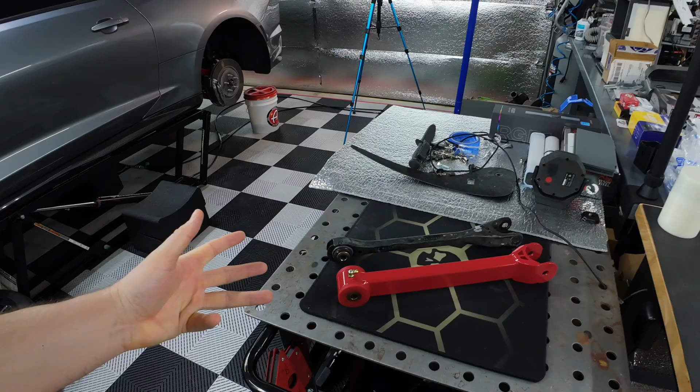Improving the performance of the 6th Gen Camaro by upgrading to the BMR Upper Control Arms. Let's get this thing installed.

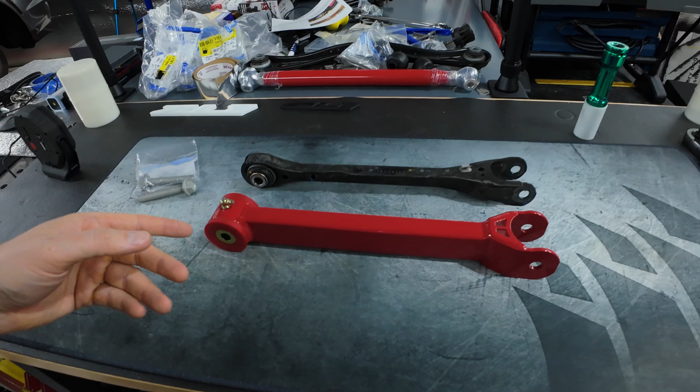Welcome everyone to the Derpzilla channel. Today I'll be upgrading to the BMR Upper Control Arms right here on my workbench. We're going from the relatively good OEM Alpha chassis Camaro upper control arm, with this kind of doughy rubber bushing. This piece isn't horrible, I've seen much worse on an OEM car. The Camaro is known for having quite good handling, but like anything, you can upgrade it with an aftermarket option.

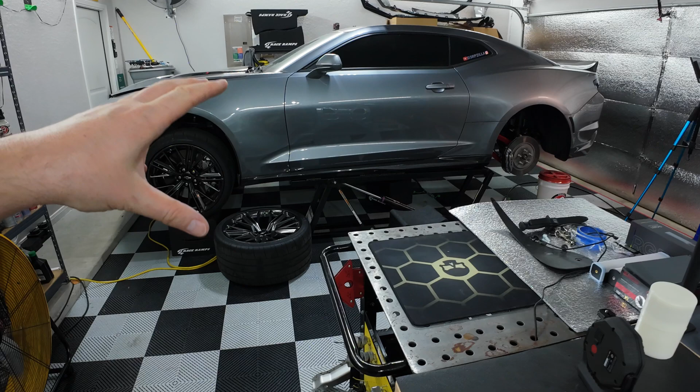I went with the BMR. This is part 5 of my BMR suspension upgrade video series. It's been about a month since my last one—I've been doing about 1,000 different projects. I wanted to jump back and hopefully get this car back on the road. It's been way too long sitting here on my quick jack in the garage.

So we're going to jump back into these. Hopefully I can get this whole process done soon. As you can see here, I have one of the BMR upper control arms. They actually have 3 variations. This is the fixed non-adjustable one, goes for about $130 from BMR. You can probably get it cheaper from other suppliers. And pretty much, this is it.

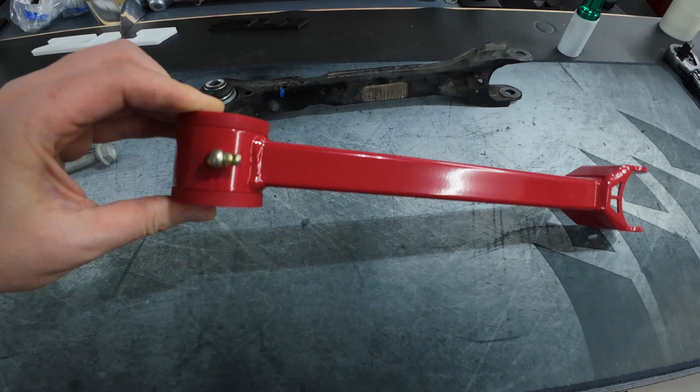You get this solid, I think 1.5 inches of box steel, CNC machined. You've got the polyurethane bushing with a super cool grease fitting, so you'll have to make sure you grease this bad boy once it's installed. Pretty solid, pretty stout—pretty much set it and forget it. You install it, and other than greasing the fittings on occasion, you're pretty much good to go. You don't have to really worry about it.

Usually not as noisy as the multiple adjustable options, but for people tracking the car relatively frequently who need rapid alignment changes, they offer 2 more options. There's the off-car adjustable, which is pretty much just another piece—I think it's on this side, I can't remember, I don't have a photo of it. What you do is actually adjust right here and lengthen your control arm based on whatever suspension alignment you're trying to dial in. Then there's the on-car adjustable, which I believe has adjustable pieces maybe on both ends, I can't remember, but the cost is about $100 more than the non-adjustable.

The cool thing about that is you can have it on the car, fully adjustable, and really dial in that alignment exactly how you want it. For me, I had a fully adjustable suspension on my previous car, a Subaru WRX, and I adjusted it once when I installed it, never did it again. It's a little noisier. I wanted to go with something a little more solid, more durable, and just get this thing installed and not have to worry about it.

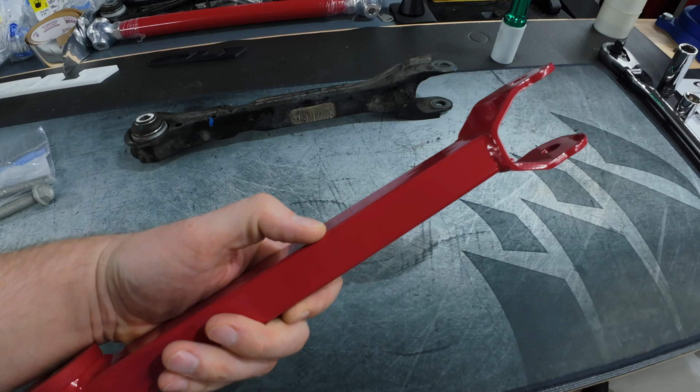As you noticed, it took me about a month to get this video out from my last one. I've got a lot of things going on, and worrying about having to get this thing adjusted all the time is just something I didn't want to do.

Anyways, we've got the car over here. We're going to take a look at what it looks like already installed in the car, and what it looks like before you install it—I actually have it installed on the other side already. Then we're going to go over what we need for the installation. Super easy, 2 bolts, 18 millimeter. Not bad. So let's go ahead and get over to the car.

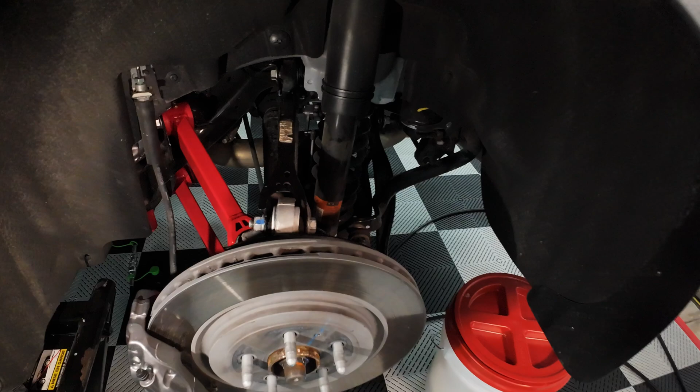I'll show you what we're looking at, and let's get this thing installed. Here we are—this is my driver's side, and the one remaining OEM part, right here, is the factory upper control arm. If you can see here, there's a brake line that attaches to the side of your upper control arm, so make sure you remove that during the installation process. You don't want to rip your brake line off while working on your car.

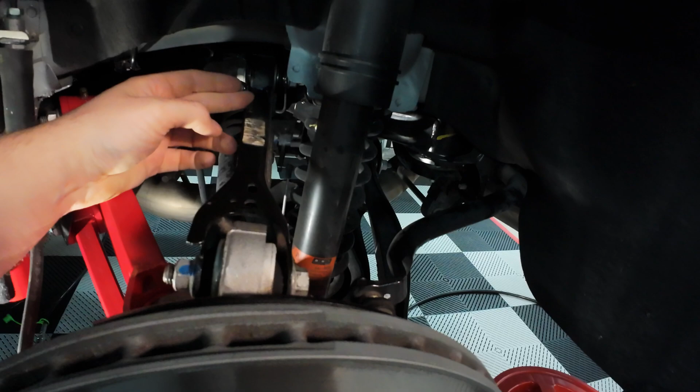The thing about the BMR piece is it does not have a fitting for an upper control arm brake line. So I'll show you what we need to do. Pretty much just zip tie, zip tie fixes everything.

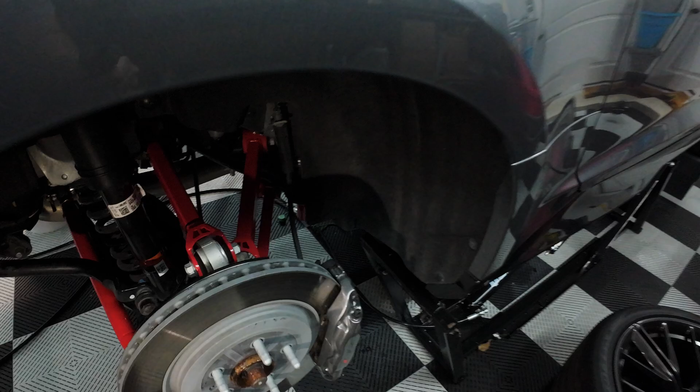So let's look at what it looks like once it's installed, which I have over here on the passenger side. And there you go. Hopefully I get some good lighting in here. Yeah, kind of hard to see.

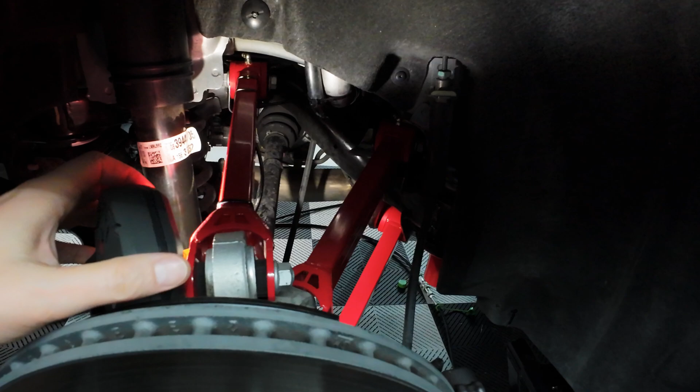Sorry about that. But anyways, we have the BMR upper control arm here. I got a zip tie, actually another zip tie. So 3 zip ties holding my brake line in a relatively pretty good position out of the way. You don't want to rip that brake line.

Notice the angle or position of your grease fittings will be on the top. Make sure you do not install this upside down. That would not be good.

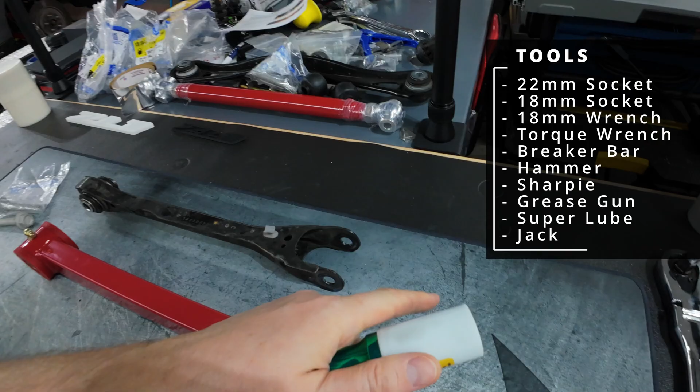For this install, very few tools are actually needed. You're going to need a 22 millimeter socket, preferably the soft touch ones that have this little plastic sleeve, and that's to actually remove the wheel off your car. Now, of course, if you're following through the whole series and you already have the wheel off, you don't need this for this one, but you'll need it to put the wheel back on once you're done with all of your suspension upgrades. You're gonna need an 18mm socket.

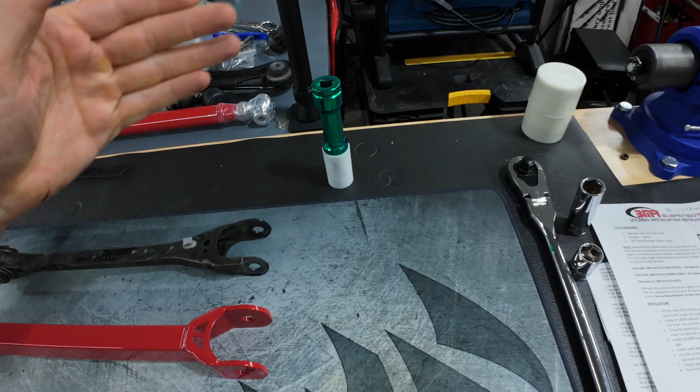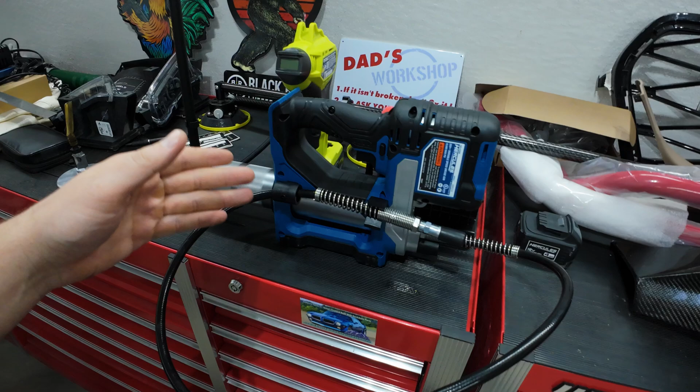You'll probably want an assortment of different sizes, a couple different ratchets. You're gonna want a grease gun of some sort. I have this fancy Hercules one from Harbor Freight, but of course a hand pump one works fine. This has the Super Lube grease that I'm gonna be using to grease the grease fitting on the upper control arm. And of course, you're gonna want a torque wrench so you can dial in your torque settings for your installation.

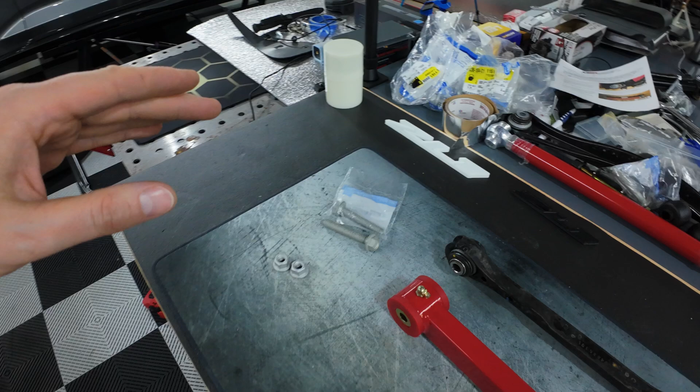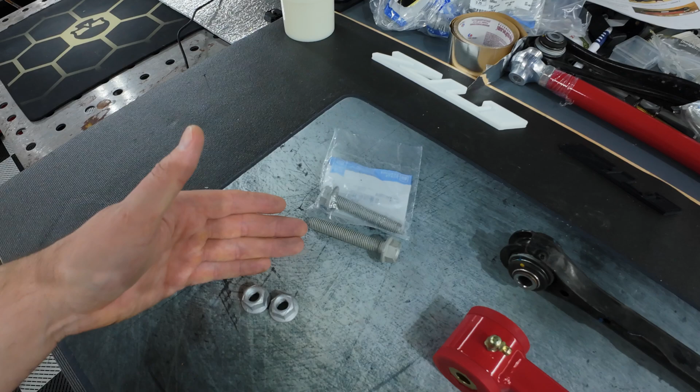And if you are hardcore like myself, new bolts and nuts - they are torque to yield. Technically, you're not supposed to be reusing these. Many people do. The torque values are gonna be slightly different if you're reusing them, but they do stretch every time you torque these, and potentially could be a point of failure.

BMR says they've done numerous testing, haven't had any fail on them, but I went with this whole suspension series. I'm replacing every bolt that's torque to yield. I figure for a few dollars, why not?

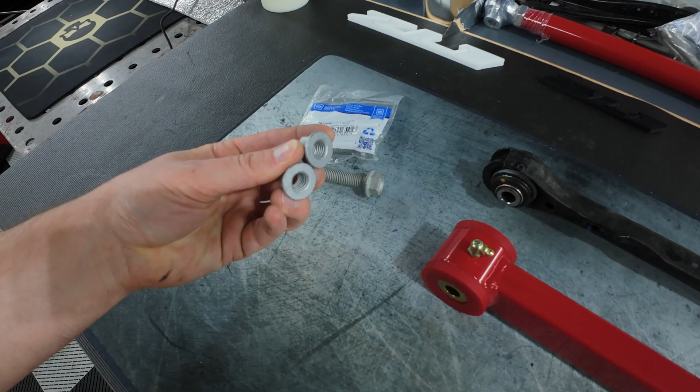But for the bolts, you're gonna need 11610908, and you're gonna need 11610909, and then the nuts, which is 11516078. I'll have, of course, links in the description for all of these and everything that you need, and a link to the BMR upper control arm and all that fun stuff.

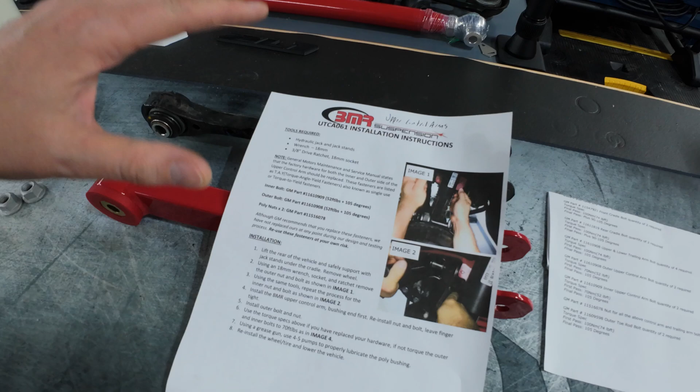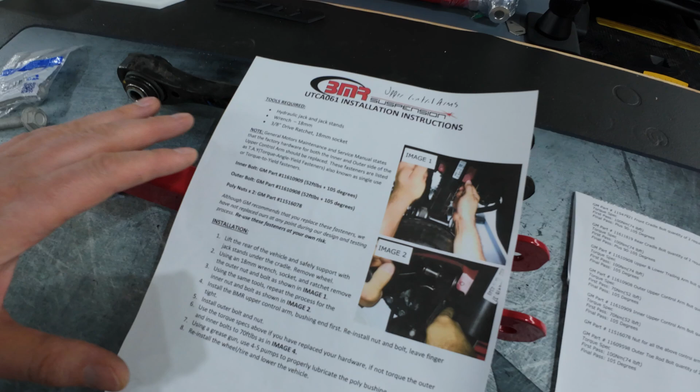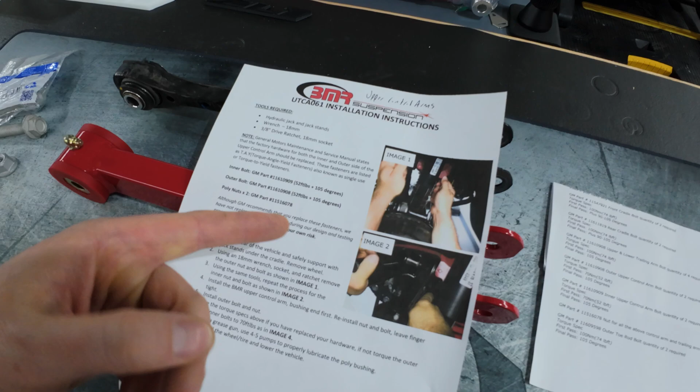BMR does offer a very handy PDF install instructions that you can download and print if you so choose. Now, they've had some questionable data on their torque values that they've changed a few times depending on when you downloaded this. I actually did get an email from them a while back with all the actual torque values. These should be the most up-to-date ones, so I'll be going off of this. For this actual install, it looks like they do match, which is good, but I've had previous ones where these wasn't matching this, so it got a little confusing.

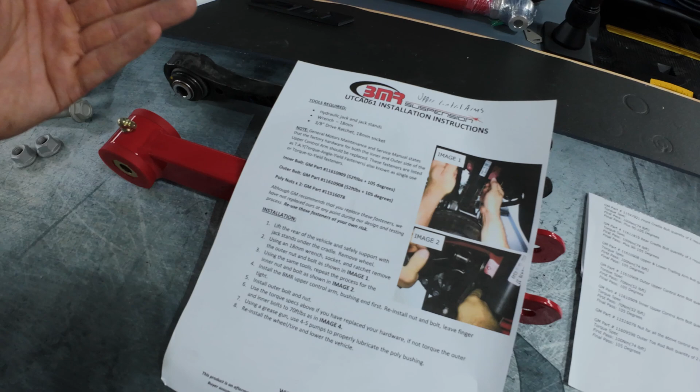But as mentioned, you're gonna, of course, need a jack. You need your 18mm socket, drive ratchet 3/8 or 1/2 inch, whatever you can fit in there. There's pretty decent room, so we shouldn't have too much clearance issues. Maybe the inner is a little bit less clearance.

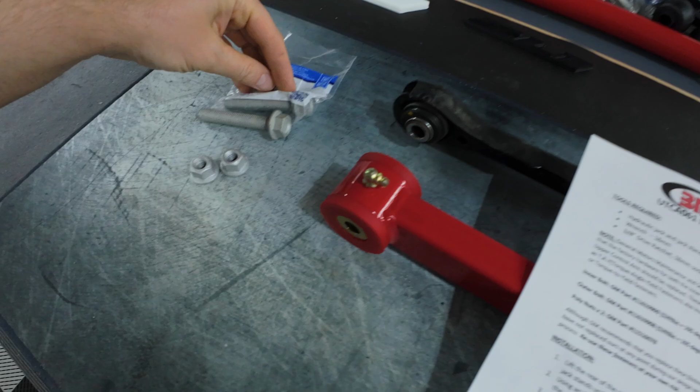Of course, it mentions inner and outer. Outer is going to be the outside portion of your vehicle, closer to where the wheel would be. Inner will be inside, closer to the inside center line of the vehicle. So make sure you don't mix up your bolts, and you put the inner where the inner goes, outer where the outer goes, because they are slightly different in length. Probably hard to see, but there is a slight difference in length on these two bolts. Very, very minor, so don't mix these up.

I mean, it probably won't be the end of the world, but you never know.

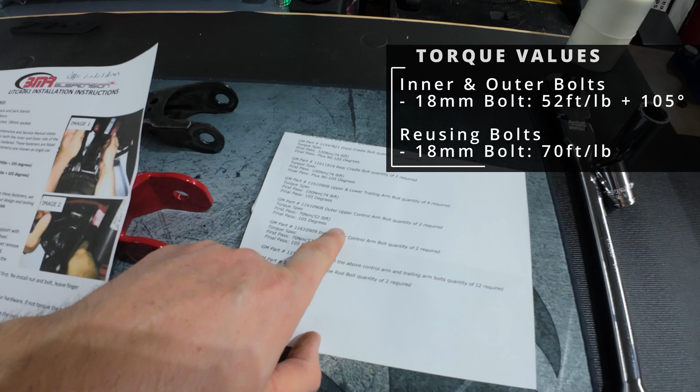Anyways, for torque values, we have the upper control arm, inner and outer, at 52 foot-pounds, so don't get mixed up by Newton meters here. It's 52 foot-pounds plus 105 degrees. That's the torque-to-yield value, where you're actually stretching that bolt.

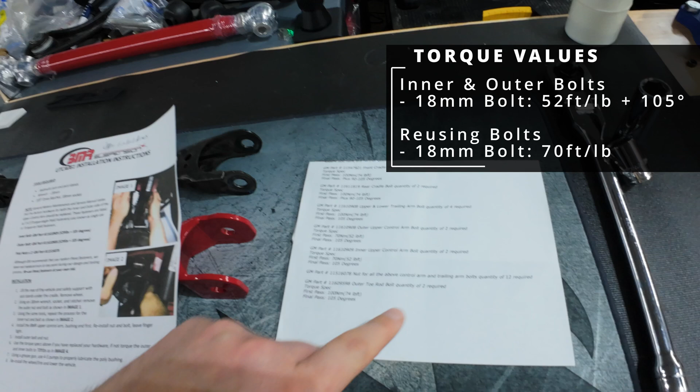So you're going to actually torque it to 52 foot-pounds, and then you're going to mark it. I'll show you that process, and then you're going to actually twist that bolt another 105 degrees. That gets us the actual torque value.

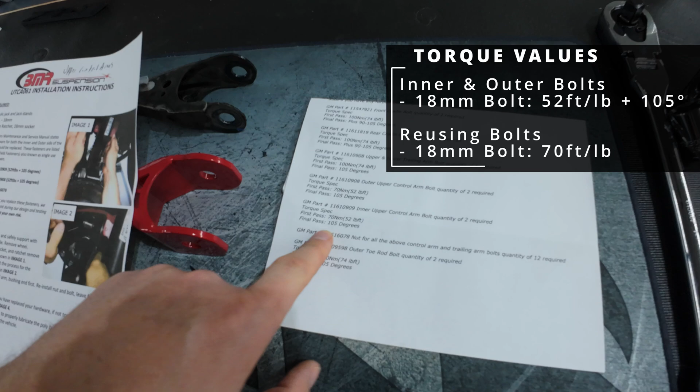I don't know why they didn't just say 80 foot-pounds or whatever it would actually be if you add the 105. It's just an extra layer of complexity, but it is what it is.

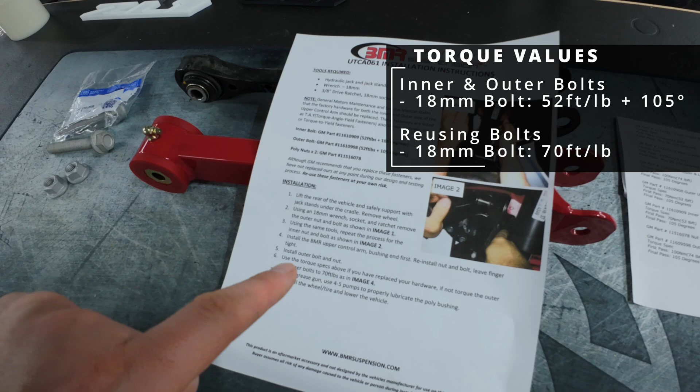And then, of course, BMR did put down the values if you are not replacing your bolt - they just say go to 70 foot-pounds, and that's it. Stop there, 70 foot-pounds. So yeah, super easy process.

Remove the outer bolt and nut, remove the inner bolt and nut, pull the OEM unit out, put the new one in, and look classy doing it.

As I am doing the non-adjustable upper control arm, there's a couple steps that you're not going to see here or in this specific install guide. But if you are doing the adjustable one on a car, the process is pretty much the same, other than you're going to want to line up your adjustable upper control arm with the OEM piece that you removed, and then you're going to tighten it down.

The instructions will show exactly what you need to do, but most likely there's going to be a bolt that you'll loosen out. You're going to be able to adjust the length of this - put a screwdriver or a thin metal rod between each set of bolt holes, and then adjust your BMR piece so that it's completely smooth.

You need to be able to slide the steel rod between the bolt holes smoothly - that means you're at the same height. You're then going to tighten it down, lock it in place, and that's going to be your starting point.

You go ahead and get it installed, then you can make your alignment adjustments either at the alignment shop or if you have some fancy alignment gear at your garage. I just wanted to cover that real quick so you can follow this video, get everything installed, and still install all 3 variations of pretty much any upper control arm for the 6th gen Camaro Alpha chassis.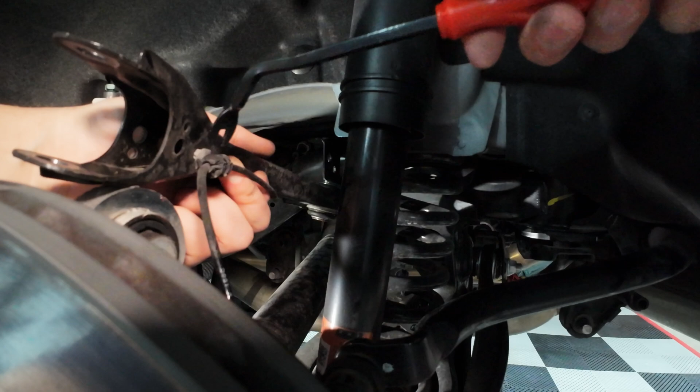And it appears I forgot one of the clips. So don't forget there's also a clip on the bottom front, outer portion of the control arm. Let's see if I can get this to pop off - it's just as easy as the other one.

There we go. And we have the OEM upper control arm that I just pulled off the car next to the BMR upper control arm that will be going onto the car.

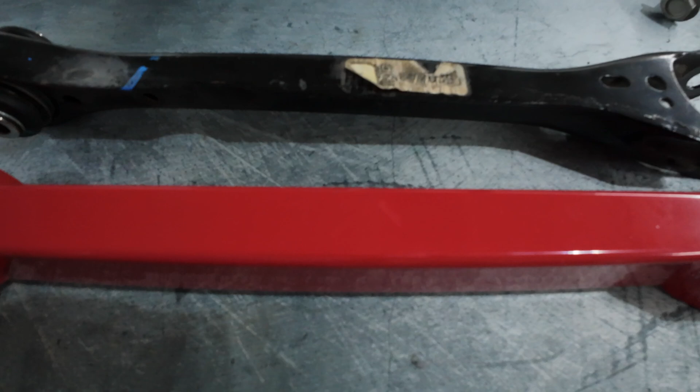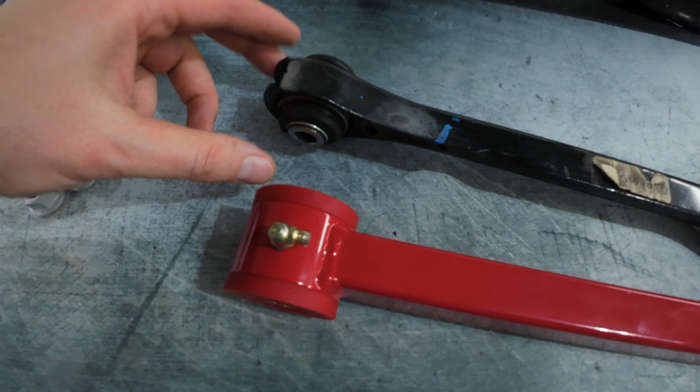I just wanted to show a quick side-by-side, even though we kind of did earlier. You can just see how much more stout this is. It's a little bit heavier - maybe 25% heavier. You can definitely tell the bushing difference here - this is the typical cheap rubber bushing on many cars, and this is, of course, the polyurethane one.

Grease fitting, no grease fitting - as it comes from the factory, if you get anything degrading this, you can't really maintain longevity.

You do notice here we have the attachment point for your brake line, and I believe this is the other one right here. On the BMR one, there's nothing. So that'd be cool if they would have welded on some tabs so you could just reclip onto the upper control arms, but no big deal.

We'll just go with the zip tie method, which works for just about anything. Now, of course, this is just some stamped steel. This is the 1 1/2 inch box steel, CNC cut, with beautiful powder coating on here. Should be very durable, should resist rust for long periods of time as long as you maintain it. So this is just a quick side-by-side so you can see the construction differences here.

Of course, the bottom.

Very nice. Of course, with BMR you can go with their hammer tone black or the red. I went with red because the interior of my car has got red accents. I've got some other red accents, and red just looks good. I mean, 5 horsepower extra just from going with red, at least that's what I was told.

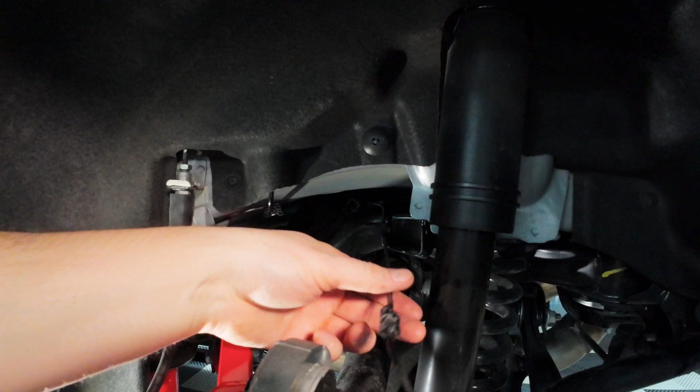If you want, you can remove these little clip pieces here that sit on the brake line on these little barrels. I figured removing these would be one less thing clattering around with your zip tie job when you zip tie this to the upper control arm. So I figured I'd remove these. I just use a screwdriver and pry them off, trying not to break them. They turned out fine, they should be reusable. If not, no biggie. But if you want to save those, go ahead and remove those if you don't want to hear that flopping around a little bit.

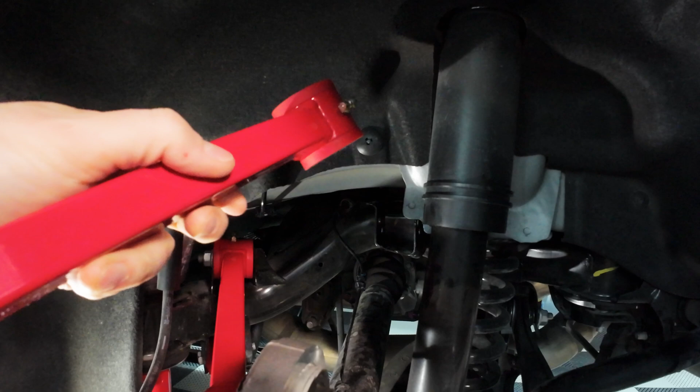Not a big deal. Anyways, I have the BMR upper control arm, this beautiful piece here, and it is going to go in pretty much like this, grease fitting on the top and on the inside of the car.

If you want to make sure to clean up the attachment point here, wipe this down, make sure it's nice and clean, because if you have any grime and rocks and stuff, it's going to grind into this polyurethane bushing and potentially damage it. So you don't want to rapidly accelerate the damage to the upper control arm and reduce the life expectancy of this piece.

Now we're just going to slide this in, and it's going to be a tighter fit because it is slightly bigger, and then it should just drop into place because it is the same size. This is probably the easiest of these three components as far as fitting goes, but it should mostly line up. You're probably gonna have to use the old screwdriver and wedge trick and kind of move stuff around, but it looks like it mostly lines up.

I have to pull it out a little bit, but once I get this lined up, I'm gonna go ahead and drop the bolts in. Remember, the inner is the 09 bolt, which is slightly longer, and the outer is the 08. The bolt for the inner is going to be going in this way, so you want the bolt head on this side and the nut on the inside. This side probably doesn't matter, so you probably just want to return it to the same direction as when you removed the bolt from the OEM part.

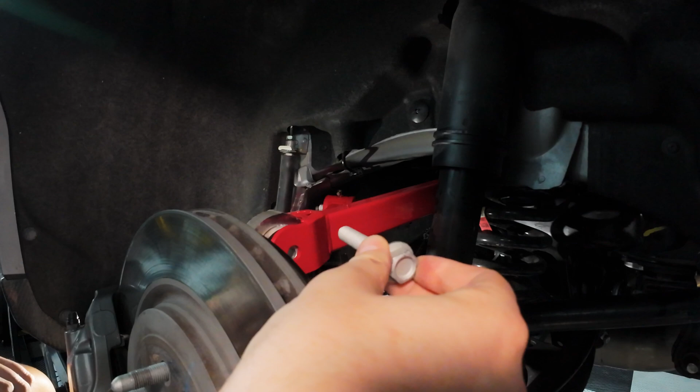It may help to use one of these non-marring hammers to tap this bad boy into place and get these holes lined up. That's what worked for me, at least on the outer. And from my memory, the bolt for the outer is going to be traveling from the back towards the front, so the bolt head is going to be on the back portion. Let's see if we can get this to line up.

Just a little bit of love, and we got the outer bolt in place. I'll go ahead and put this nut on here. Of course, I'm not going to tighten it up yet. And I still need to do the inner.

I got the inner bolt started at kind of a worse angle here. I'm trying to get it to feed through. No real good room for a hammer, so you might just need to give it a little feel and then try to drive it through.

I was able to get the bolt in place. I ended up using this Hercules power tool here for torque, and I was able to get it close enough where the threads caught, and I was able to then pull the bolt all the way in place. Now I just need to get the nut installed.

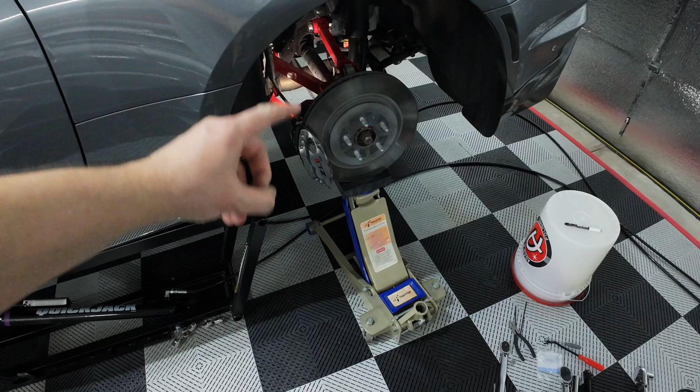So I almost royally effed this install up. I was beginning to torque everything and forgot to put my suspension under load. Technically, the car should be on the ground with wheels on, fully loaded suspension, but you can't really access your bolt to do that. So for me, this is the next best thing.

Get a jack underneath the wheel or the rotor with some padding, like a rubber piece right here, and begin jacking up the side of the car that you're working on. For me, of course, it's the rear driver's side. Then I keep lifting until my quick jack blocks become loose, which means the weight of the car is now on the suspension and I can proceed.

So now I'm going to torque all of these two bolts, 52 foot-pounds, plus 105 degrees of additional rotation. And yeah, I'll show you that.

You'll see the suspension down on the ground because I actually did all of that with the car not loaded. So I'm gonna go ahead and do all that stuff again, but watch that - you'll notice the wheel is drooping, not up. That part's incorrect, but the whole procedure for torquing everything and applying the torque to yield is correct. So we'll jump back after I've done this correctly and fix my own mistake.

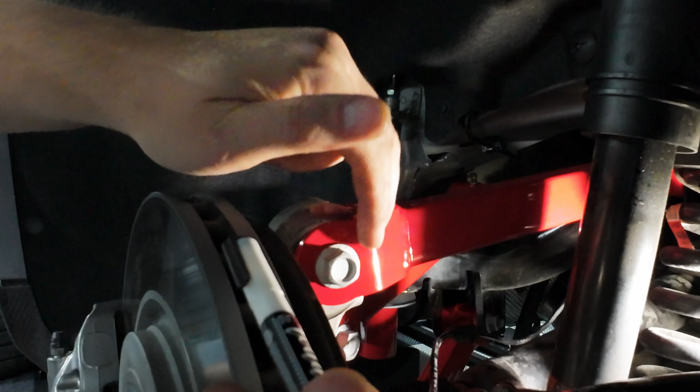Looks like I already got it at 52 foot-pounds. Now we can do the torque to yield. We're at the outer bolt head right here, and we're going to do our torque to yield process. You're going to need something like a Sharpie or a paint pen, because we're going to have to actually mark on the bolt and on the actual component that it's bolted to.

And we need to do 105 degrees. For these kind of bolts right here, I'm not going for super accurate. If I'm off plus or minus 5 degrees or so, it should be fine. They do sell specific measurement tools you can dial in that will show your exact degree, but I figure plus or minus 5 degrees should be fine. I like to pick a starting point that I can easily see, and then an ending point that I can easily see that's 105 degrees.

So I'll go with, let's say, this point right here. If you can see that, 90 degrees on this type of bolt should be right here - so from here to here, that's 90. A little further is 105. So typically, I would say this point right here, two points past, should be about 105 degrees.

So I'll mark on the actual component, that marking here, about there. And then we of course want to mark on the bolt itself where you can see it with a socket over it. We'll do one here, and then we'll do, let's say, here.

So we're going to take this line and get it to line up with this line right here - so 105 degrees. The big key with this is do not let your nut move while you're applying this extra torque, because if the nut is moving with the bolt, it's going to throw off this reading. So if you use a paint pen, let it dry. Go ahead and get a socket on here and a breaker bar or something, because it's going to be kind of a workout. Just giving you a heads up.

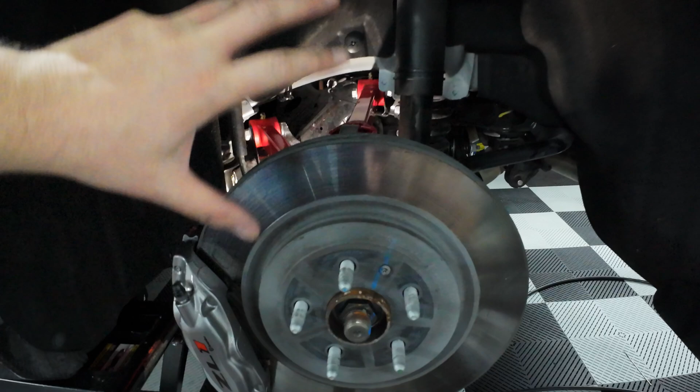Okay, a little bit of time travel here. I initially torqued the bolts with the suspension not under load, removed the bolts, replaced them with new bolts. Thankfully I bought extras, and loaded the suspension as mentioned earlier. Got everything torqued, torque to yield, all that fun stuff, redone. So if you're wondering why the location of this rotor is moving around, that's why. Anyways, we're back to where I was before I realized my mistake.

And I've attached my zip ties here. Now I have one here, two in the back, and I just have it placed so it's in front of this little barrel piece on the brake line, and then around the barrel piece here, one on each end, to keep the zip ties from sliding around and repositioning. So this should be good.

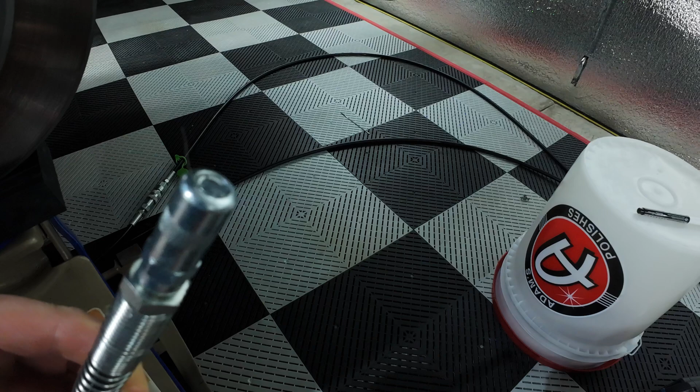It's not super tight. Hercules grease gun, super crappy fitting that does not like to come back off. So if you have a normal grease gun, the pump action ones, I think it said 4 to 5 pumps to probably lubricate. This one I just kind of run pretty slow until I see a little bit oozing back out, call it good. All looking pretty sexy in there.

Car is back, free hanging the suspension, so no longer under load. And yeah, overall, two bolts, not too bad. A little grease fitting - a bit of grease came back out, so maybe I overfilled it just a tad when I let the suspension back down, so I'll have to wipe that up. But overall, not too bad.

So let's go ahead and wrap this one up. That concludes the installation of the BMR upper control arm on the 6th gen Camaro, specifically my 2021 Camaro ZL1. Overall, pretty easy installation, just make sure you don't lose track.

I apologize for jumping around after discovering my mistake with loading the suspension before torquing the bolts. Make sure you do not forget that - make sure you load the suspension before you torque the bolts, or it's going to throw off some of your performance. You're going to bind up your bushing, and it's just not good to not have it under load when torquing everything. So don't do that.

Anyways, made myself some extra work, hopefully less work for you guys.